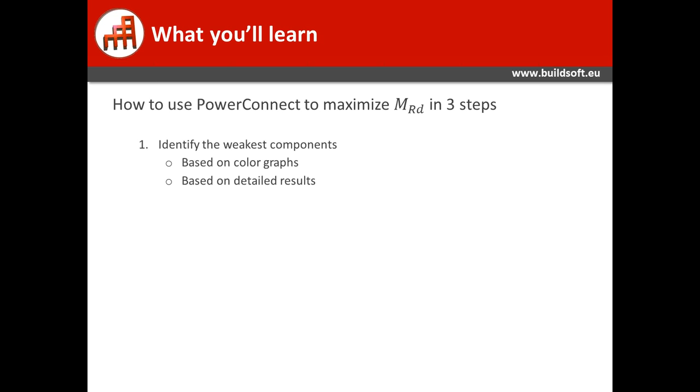This can be done based on the color graphs or on the detailed results. In the second step, we are going to calculate alternative configurations of the connections by adding, for example, stiffeners, changing end plate or bolt dimensions, and playing around with the bolt positions. Finally, we will have obtained an optimized and therefore less expensive connection, and this all within minutes in PowerConnect.

So basically we will show you how to interpret the results correctly and how to increase the moment resistance step by step. Now, first of all, improving a connection is not trial and error. It's not adding random stiffening elements and seeing what happens with the results. No, it is really modifying those elements that will have the most influence, so that you only need to add the elements that are really necessary, in such a way that the costs stay limited.

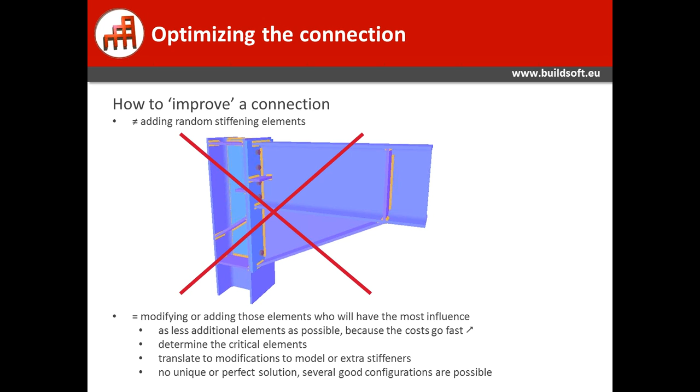Now, there is no unique or perfect solution. There are several good configurations possible. We will show you 2 methods, or 2 ways, to maximize the resisting moment.

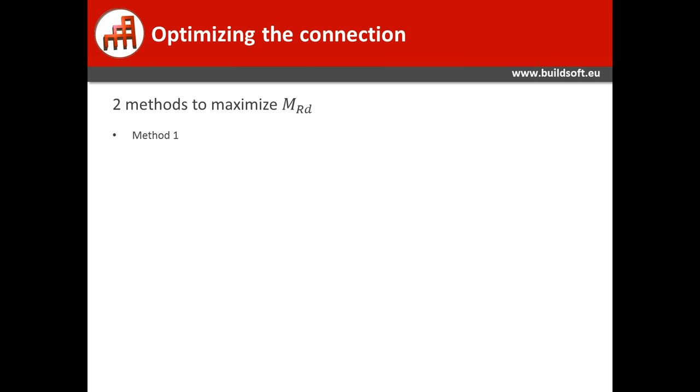The first one is a basic, very fast method based on the color graph results in PowerConnect. Within minutes you will have an economic design of your connection. The goal here is to add stiffening elements in the right places.

The second one is a more advanced one, where we go digging deeper into the PowerConnect results. It's really meant for fine-tuning the results, and we will also need some background information on the Eurocode calculation method.

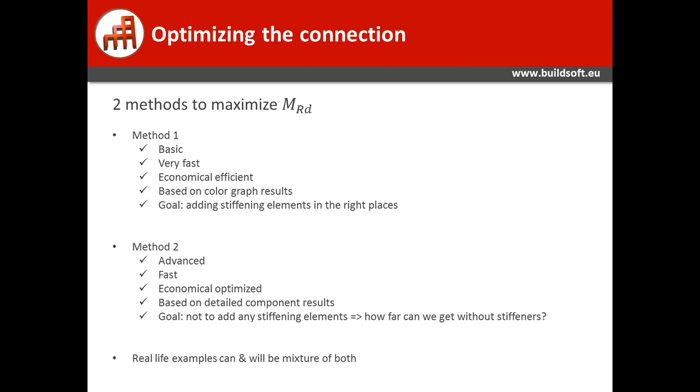Our aim here is to not use any stiffener at all, so we really want to know how far we can get without the use of any stiffener. Now, of course, in real life it will be a mix of both methods, so you will be using sometimes method 1 and at another time you'll be using method 2.

To make things a little more hands-on, we'll be using an example. It's a simple moment connection, an I-beam to an H column. The bolts are diameter 20 millimeter, the strength class is 8.8, and the welds are 6 millimeter.

So let us now go to PowerConnect. Here we have our first example.

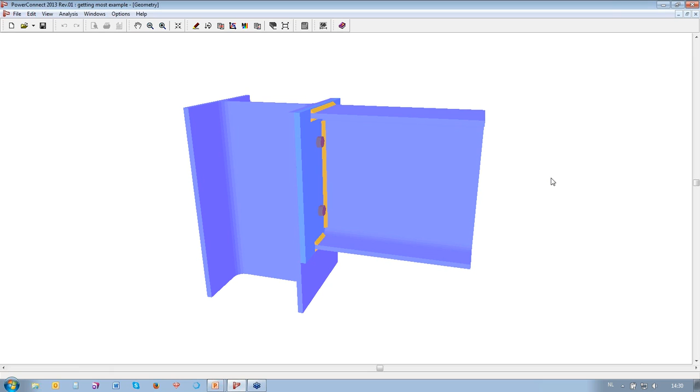Now let us start by optimizing the bolt position. I'm going to double click the bolts and optimize the bolt positions. What does this mean? It means that PowerConnect will try to place the bolts as high as possible, as close as possible to the beam flange, and as close as possible to the beam web, taking into account all minimum distances required by Eurocode.

Okay, let us now calculate the connection. And currently we have a resisting moment of 57 kilonewton meter. Now, how can we increase this resisting moment?

Well, we have 2 graphs. We have here a graph with the applied moment, but the applied moment is currently 0, so we'll be ignoring this graph. We'll be looking at the other graph over here, and this is the graph with the resisting moment, so this is the 57 put on the connection.

And what you see over here is that the elements that are most loaded will have a more red color. So in this case, the column web is the most loaded element, the most critical element of the connection, and it's shown in red. So it will be the first element to fail in the connection right now.

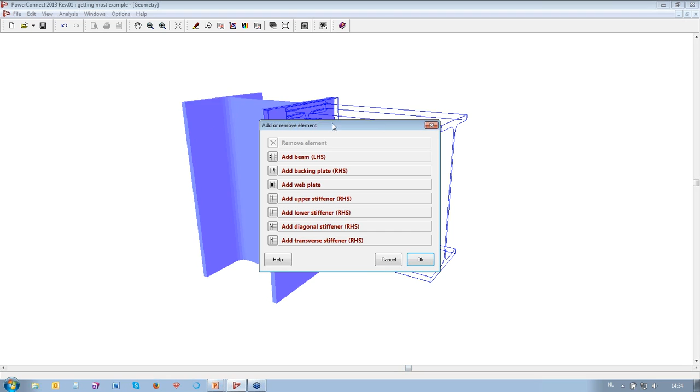So let's select the column. I'm clicking one time with the right mouse button, and here we have some elements we can add to the connection. One possibility is a web plate. Another possibility is an upper stiffener or a lower stiffener, and we also have, for example, a diagonal stiffener. So let us start by adding an upper stiffener.

Okay, let us calculate the connection again. Calculate. Now, as you can see, we have increased the resisting moment. We are now at almost 79 kilonewton meter. And if we look at the color graph, it's no longer only the column web, but also the column flange, the end plate, and the bolts who are now the critical elements. Who will now fail first?

So what are the possibilities right now? Well, we could go on with the column web, so maybe we could add a lower stiffener, or we could try to do something about the bolts. So what could you do about the bolts? You can choose a bigger diameter for the bolts, you could improve the strength class, or you could also add bolt rows.

Now for the end plate, you could modify the thickness of the end plate. For the column flange, you could add a backing plate. So many options, many possibilities. Let us simply choose one - for example, let us add some bolt rows.

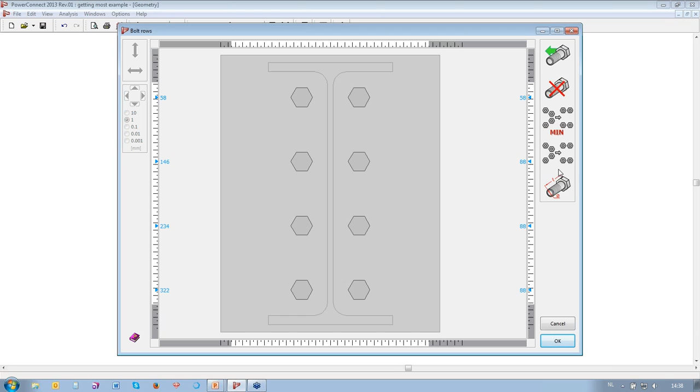However, something we could do over here is maybe changing the strength class of the bolts. So instead of an 8.8, we could use a 10.9. You can change this over here in the bolt details. So instead of 8.8, we're choosing 10.9, confirming with OK, OK, and let us now calculate the connection again. And we're now at 107 kilonewton meter.

So still, the column web is critical, the column flange is critical, the end plate and the bolts are critical. Let's focus again on the column web, and we could, for example, add a lower stiffener. So I'm returning to the geometry, selecting the column, and let's add a lower stiffener. Calculate it again - we are now at 130, so perfect.

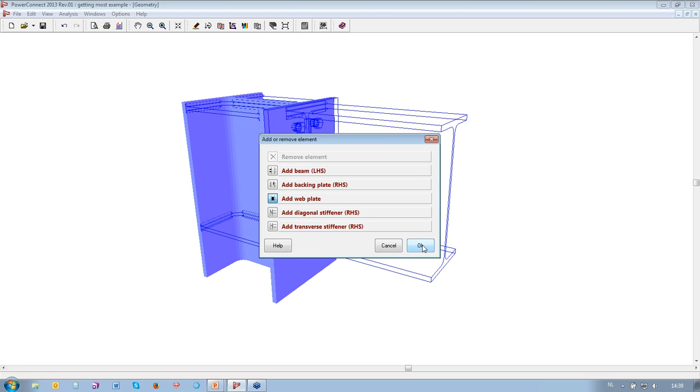Now we still have the column web problem, the bolts problem, the column flange and the end plate problem. What can we do? Well, maybe adding a web plate. So I'm selecting the column and I'm adding a web plate to the model. So let us calculate the connection again, and we are now at...

148. And as you can see, the column web is no longer a critical element in our connection. It's even so that the beam is becoming more critical right now. Now, if you are using a web plate, you should be very, very careful, because the influence of a web plate is very interesting, but you need to respect some minimum distances mentioned in Eurocode.

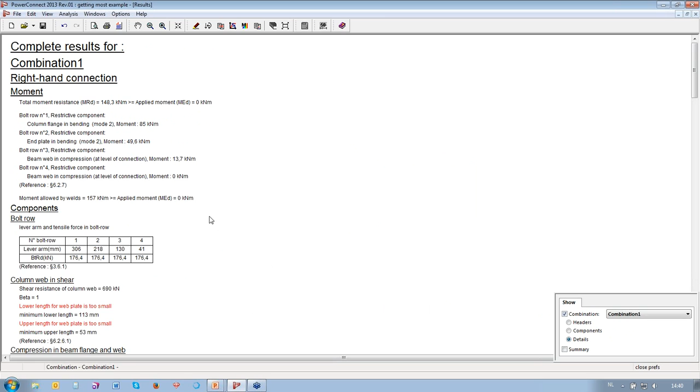If you go to the detailed results of PowerConnect for our current combination, you can see that Eurocode is requiring some minimum upper and lower lengths for this element. The minimum lower length of the web plate is 113 millimeter, so about 120, and the minimum upper length is 53, so almost 60 millimeter. If you don't foresee these minimum lengths in your model, in your connection, you cannot use the positive influence of the web plate.

So I'm returning to the geometry right now, and for the web plate, I'm going to double click it. I'm adding a minimum upper length of 60 and a minimum lower length of 120. We'll click OK. This is now the correct configuration, the correct way to use the web plate. If we calculate again, we will have just the same results, being 148.

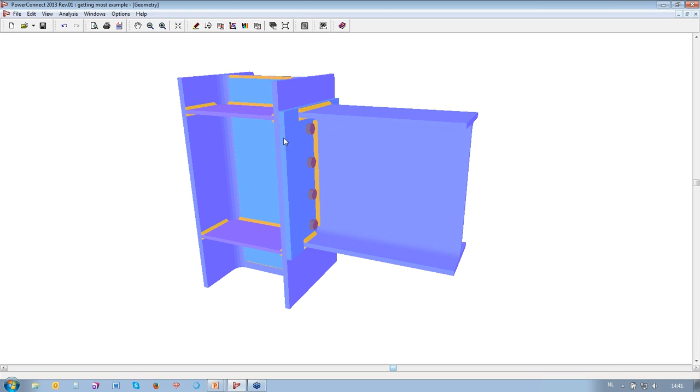Now, say you have the possibility to make these extensions in the model, maybe it would also be interesting if you could extend the end plate. So just to show you the influence of this extension, we will delete the web plate. We will add it later on, and I will now double click the end plate, and let us go for an upper extension of 75.

I will double click the bolts now, and let us optimize the bolt positions again. Click OK, and now we can calculate the connection again with this new added upper extension for the end plate, and we are now at 157 kilonewton meter.

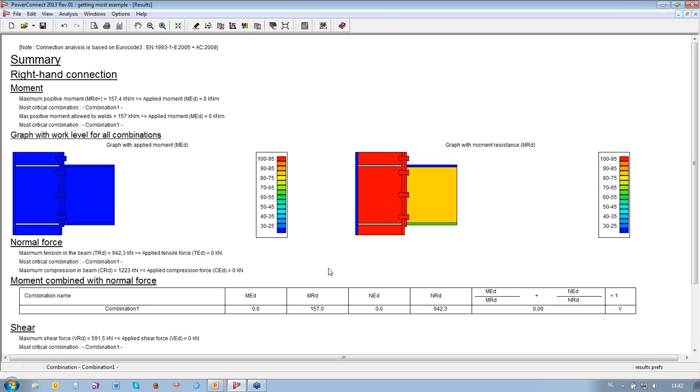And now, as you can see, still column flange, end plate, bolts, column web are critical. So maybe for the end plate, we could thicken the end plate a little bit. Double clicking the end plate, instead of CF, which is the thickness of the column flange, maybe I could use 18 millimeter. Let's calculate it.

As you can see, the end plate is no longer a critical element, but still the column flanges. It's not so easy to modify the thickness of the column flange because this is already a fixed parameter, a fixed value. But you could use a stiffening element to modify or enhance this.

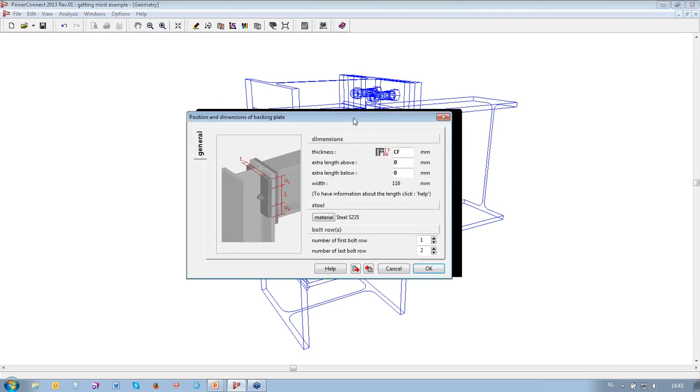So I'm going to open the dialog to add an element, and the correct element over here is a backing plate. We'll add a backing plate to the column flange, and I will double click the backing plate, and let us take a look at the bolt rows. Currently the backing plate is going over only the first two bolt rows, but I want the backing plate to go over all 4 bolt rows. We'll be calculating the connection again, and we are now at 168.

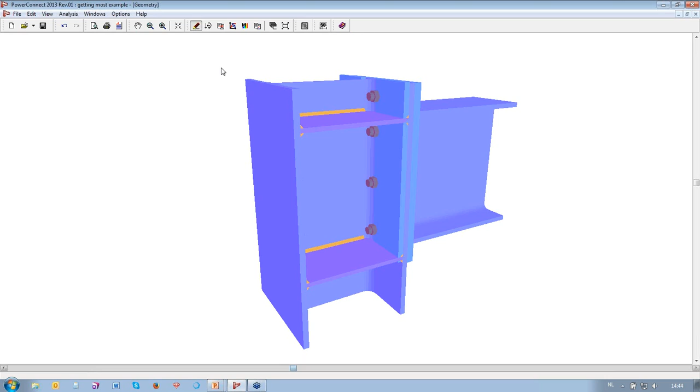And of course, still the bolts are in red, the column web, so we could add our web plate again and calculate the connection again. And we are now at 194, almost 195 kilonewton meter resisting moment.

So we started off with 57, so we now have almost 4 times as much as our starting value of resisting moment. And as you can see here in our color graph, the beam is becoming critical right now. So this is the point where you should do something about the beam if you want to further increase the resisting moment. However, another option could be, for example, adding a haunch.

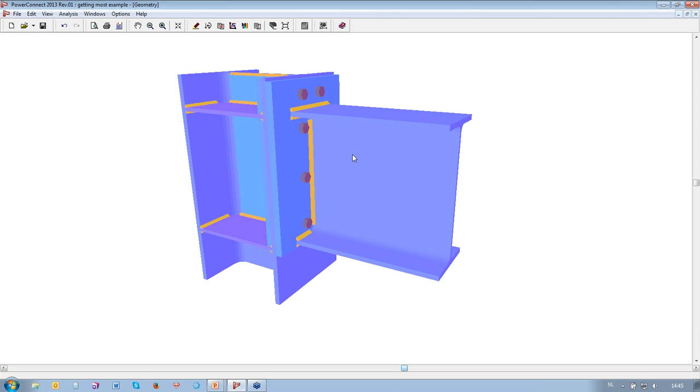So we deliberately didn't use any haunches until this point because we really wanted to show the influence of these different stiffeners. For adding a haunch, I'm selecting the beam, and here you can opt for a lower haunch, for example, and then you can double click the bolts and optimize the bolt positions, and calculate it. Now we are at 288 kilonewton, which is a lot.

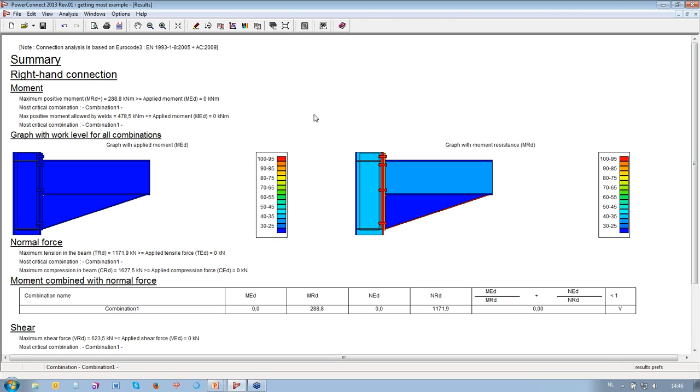So let us now return to the PowerPoint. Let's have a little summary of our example. We first started out with a resisting moment of 57, and the critical element was the column web.

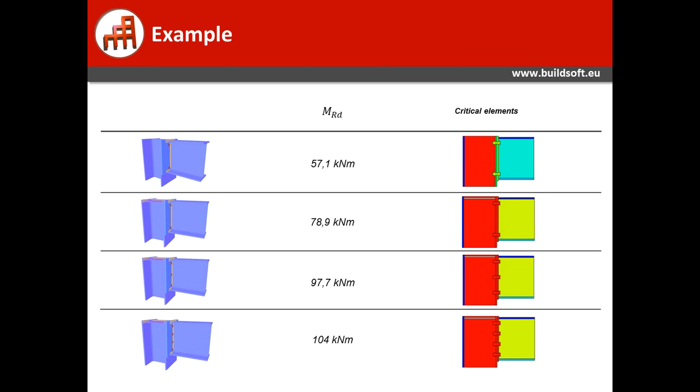Then we added an upper stiffener, and we had a resisting moment of 79. We added a bolt row, so we went to 98. We added another bolt row, we ended up with 104. After that, we could not add any more bolt rows, so one of the options was adding a lower stiffener.

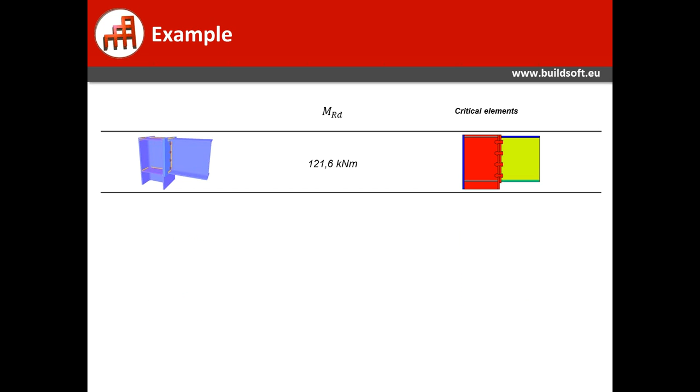We also changed the bolt quality to 10.9. Then we added the web plate. Be careful, of course, if you're using the web plates, please respect the minimum distances required by Eurocode. We removed the web plate, and we added an upper extension for the end plate.

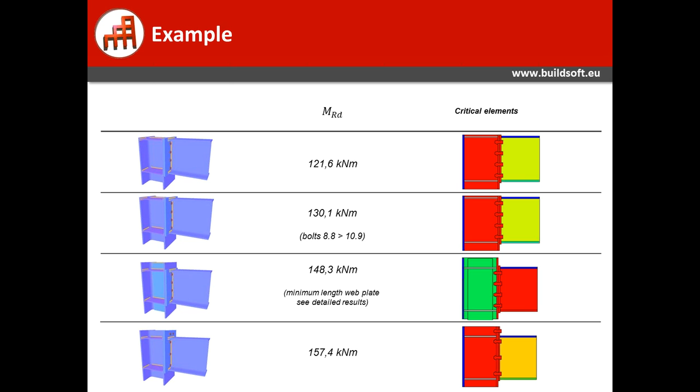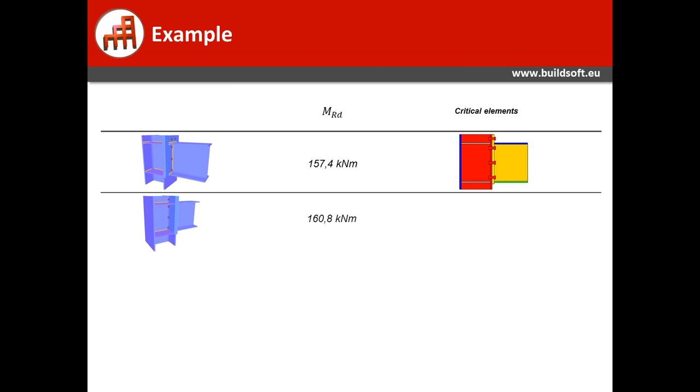We have modified the thickness of the end plate, added a backing plate, and added the web plate again. Our final value was almost 161 kilonewton meter resisting moment. So that was it for the first method.

Now for the second method, the second way. This is the way you want to follow if you really want to fine-tune the results, if you need that little extra, but it also takes more time and some knowledge about Eurocode. So we'll be starting the second method with the Eurocode calculation model.

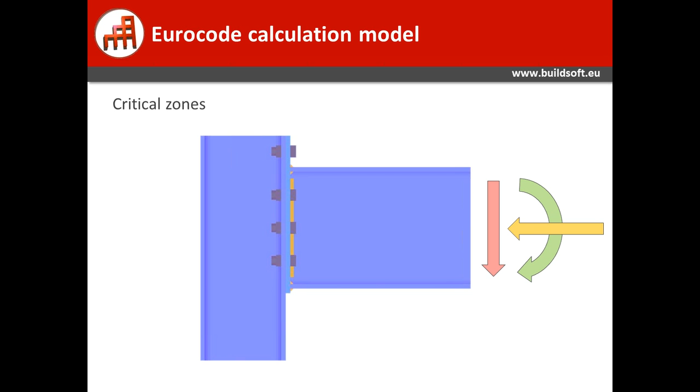Say we have a beam column connection. We will add a normal force, a shear force, and a moment force. What will happen with the connection? Well, something like that. It's a little bit too much, but you get the idea.

So we can distinguish different critical zones in this deformed connection. Over here we have a zone in tension in the column. We also have a zone in tension in the beam. We will have a zone in compression in the column, and also a zone in compression in the beam, and we'll have a zone in shear.

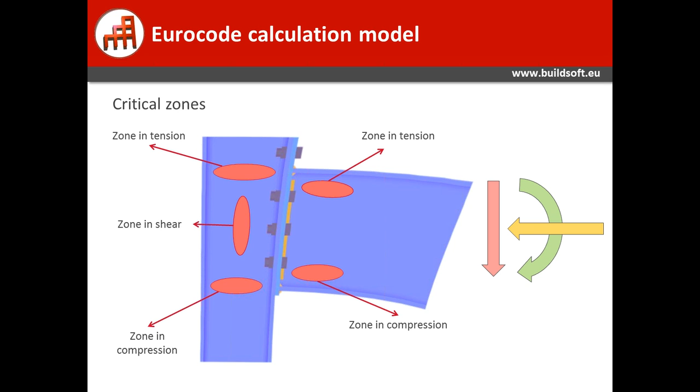Now each of these zones consists of different components, different parts that can fail individually. For example, in the tension zone, we could have yielding of the column web, yielding of the column flange, yielding of the beam web, yielding of the end plate, bolt failure, weld failure.

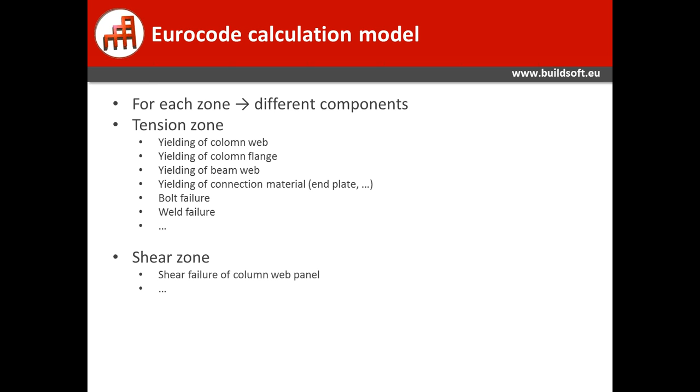For the shear zone, we could have shear failure of the column web panel. And for the compression zone, we could have crushing and local buckling of the column web, and crushing and local buckling of the beam web and the beam flange.

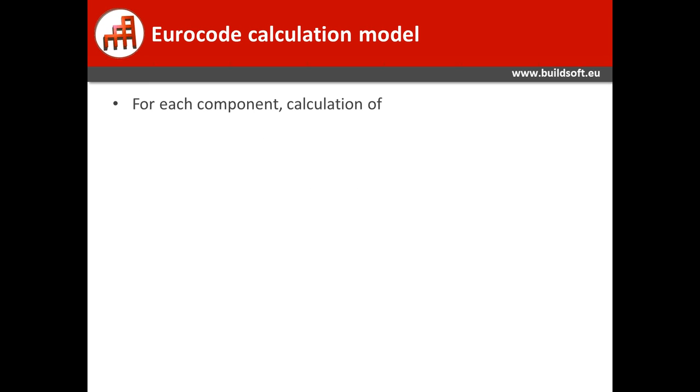Now, for each of these components, of these parts, we'll be calculating the resistance, expressed as a maximum tensile force F. And we'll also be calculating a stiffness, expressed by the stiffness factor K. Now, we will not focus today on the stiffness, so we can ignore this for the examples today.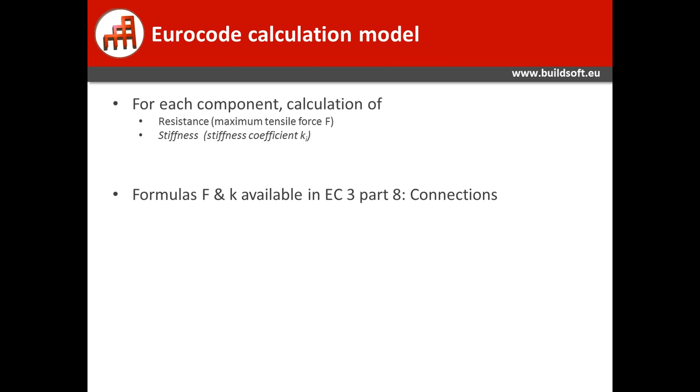Now, in Eurocode 3 part 8, this is the part about connections, you can find all kinds of formulas for the calculation of the maximum tensile force F and the stiffness factor K. For our connection in particular, which components or which parts of the connection do we need to check, do we need to verify?

Well, first of all, we need to check the column web in shear. And I've also mentioned the section in Eurocode where you can find the formulas. The second one is the column web in compression, the column web in tension, the column flange in bending, the end plate in bending, and the beam flange and web in compression, and finally the beam web in tension.

Now, we have made an overview of all these formulas, and on the left-hand side we will place all the formulas for the column, and on the right-hand side we will put all formulas for the end plate and the beam side.

So the first one to check is the column web in shear, and this is the formula. What do we see over here? We see the yield strength of the column web. This is a very simple, known value. We have the safety factor and we have the shear surface of the column web.

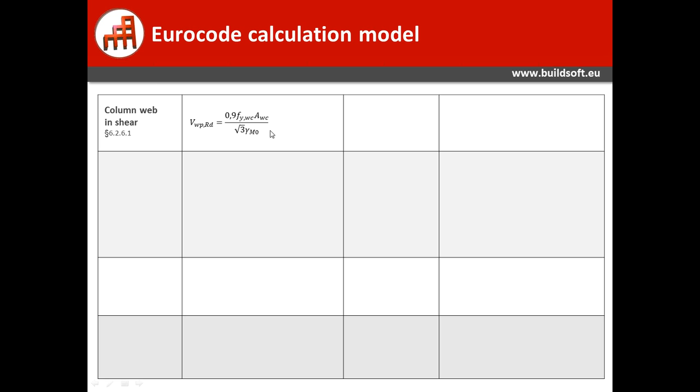Second ones to check are the column flange in bending and the end plate in bending. Now I've grouped them together. Why? Because these checks for the column flange in bending and the end plate in bending are very much alike. There are like 99% similarities. So there are 3 formulas to be checked, and you have to take the minimum of all 3.

So this is the first one. What do we see over here? Well, it's the thickness of the column flange, the yield strength, safety factor, and some effective length, and an M factor. Now, if you take a look at the end plate in bending, it's just the same formula, except, of course, instead of the thickness of the column flange, we have the thickness of the end plate. And instead of the effective length for the column flange, we have an effective length for the end plate.

And this is the same really for the second value to be checked. So we have here the thickness of the column flange, the yield strength of the column flange, and here we have the thickness of the end plate and the yield strength of the end plate. So these checks are very, very much alike.

Now, the L effective and the M and the N factor, which we don't know, are mentioned in Eurocode 3 part 8, and they depend on the different bolt positions. You can find formulas to calculate them. What else needs to be checked? Well, we have the column web in tension and the beam web in tension. And again, these 2 formulas are very similar.

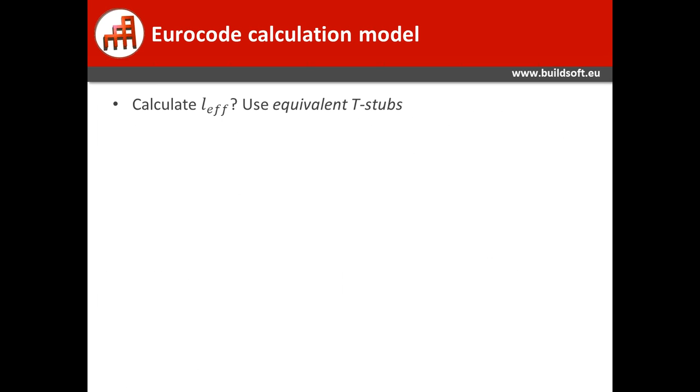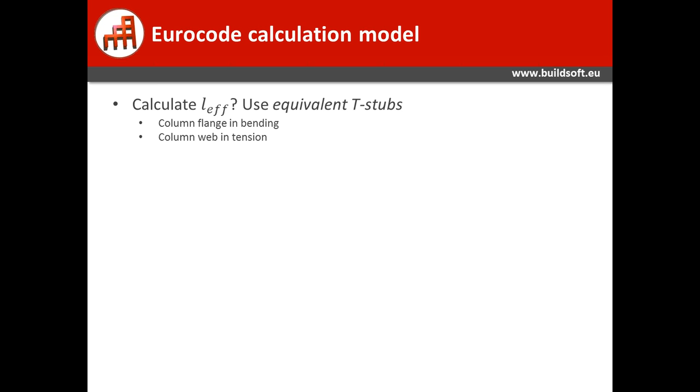Now, for the calculation of the L effective, so the effective length, Eurocode uses equivalent T-stubs. The following components use this T-stub: the column flange in bending, the column web in tension, the end plate in bending, and the beam web in tension.

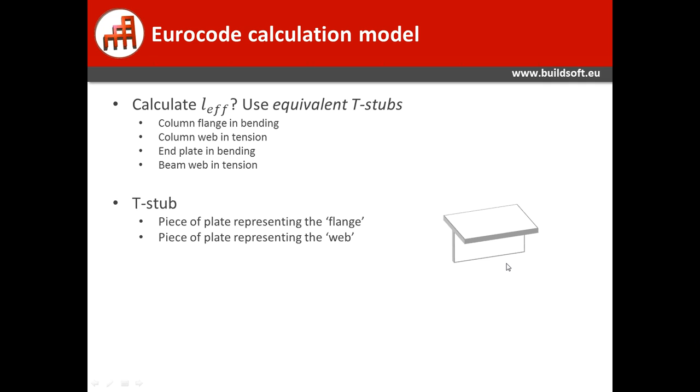Now, a T-stub, what is a T-stub? Well, it's a piece of plate representing the flange, and a second piece of plate representing the web, and here you can see how we got the T name. So this is forming a little T, and we need also one or more bolt rows, with one bolt on each side of the T-web.

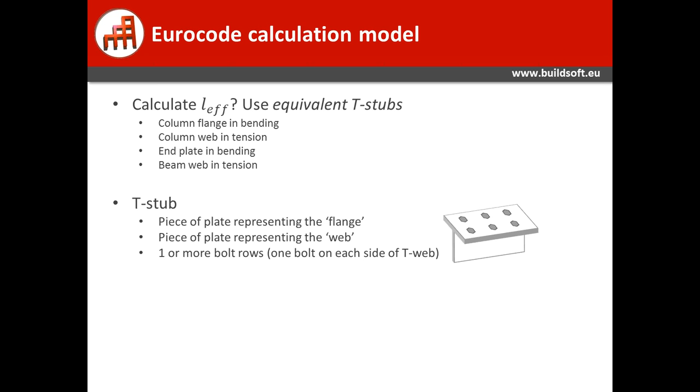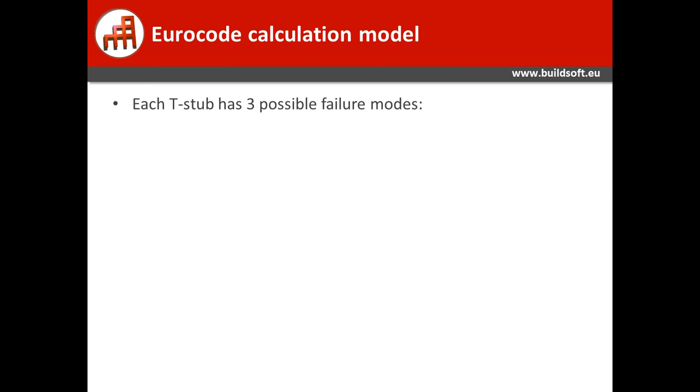Now, what is so special about these T-stubs? Well, each T-stub has three different possible failure modes. The first mode is a complete yielding of the flange, so the flange of the little T-stub will fail first, and the bolts will remain the same. They will not fail first.

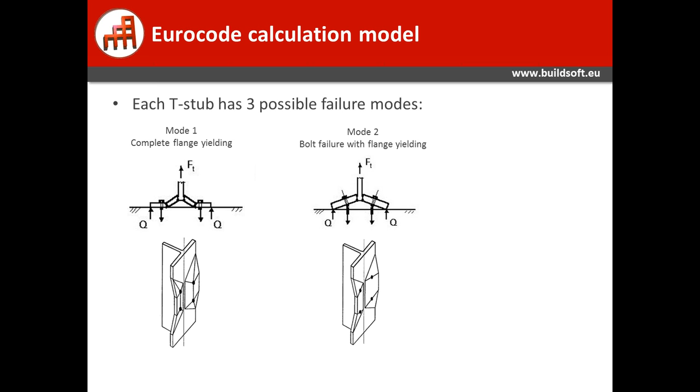In a second mode, a second possibility of failure is that the bolts together with the flange will fail. A third possibility is that only the bolts will fail, so the flange is stronger than the bolts, and the bolts will fail first. Now, mode 1 usually occurs when you have thin plates but strong bolts, and mode 3 will occur when you have thick plates but weaker bolts.

Now, you never know in advance which of the three will be determining or decisive, so you need to calculate each of these three modes and take the minimum. This is in correspondence with the three different tensile forces for the column flange in bending, and the end plate in bending.

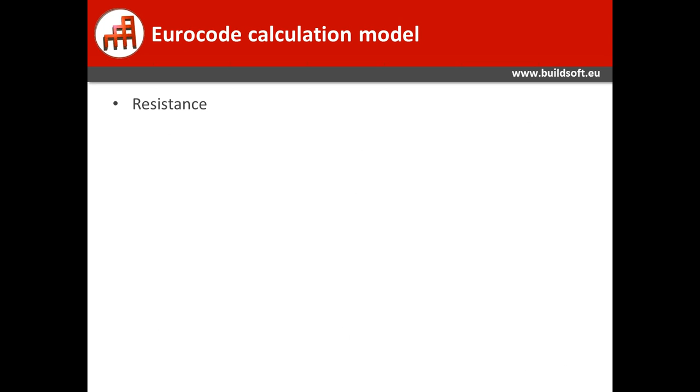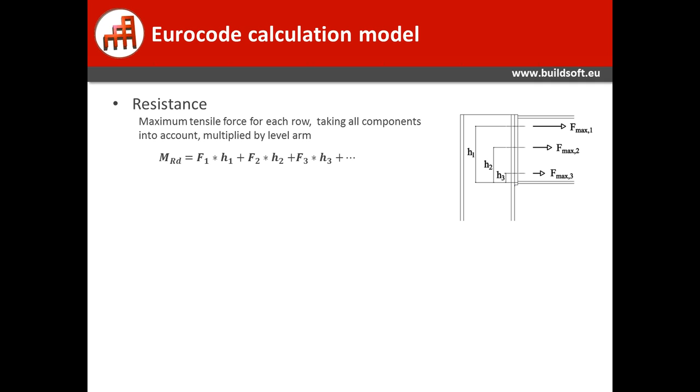Now, say we have found for each part, for each component, the maximum tensile force. Well, then you have to take the maximum tensile force for each row, taking into account, of course, all the components, and for the calculation of the resisting moment, we will multiply these tensile forces by the lever arm. That will give us a resisting moment.

Now, what should you remember for the resisting moment? Because we have told a lot. Well, as you can see, directly in the formula, you have a direct influence: the lever arm is very, very important to increase the resisting moment. Another thing is, of course, that the maximum tensile force is a minimum of all the different components. So if you want to have a higher resisting moment, so a higher tensile force, you should affect the minimum of all these components. Otherwise, the tensile force will not go up.

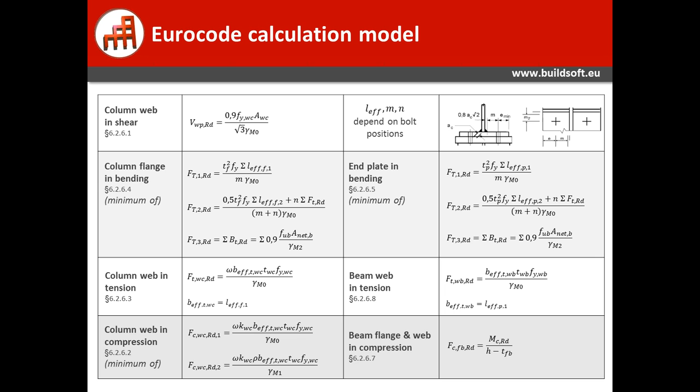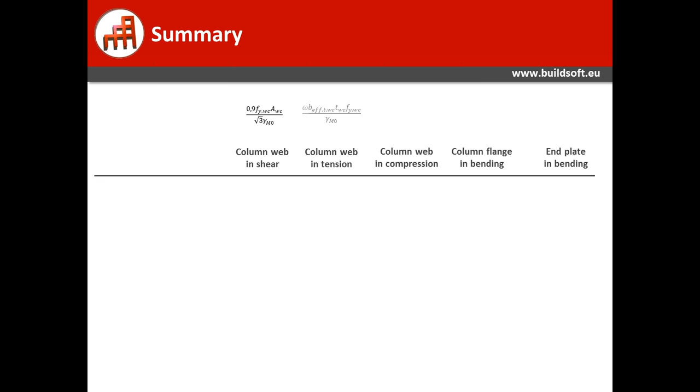So if we take a look again at our table with the different formulas, and let us assume that we are not going to focus on the beam part, so only the end plate and the column part. So let's forget the beam formulas. Well, we rearranged the formulas a little bit so that we can get a summary of the influence parameters in these formulas. So we have our different components with the formulas, and now let us see what is influencing these components. Let's start with the bolts.

Say we were to edit or modify the material, so the strength class of the bolts. Which components will be affected? Well, it will clearly be the column flange in bending and the end plate in bending, but only if mode 2 or 3 is critical. If it's mode 1, the material will not have any effect at all.

Now, for the diameter of the bolts and the positions of the bolts, the column web in tension will be affected, as well as the column flange in bending and the end plate in bending.

For the end plate, if we change the thickness or the material of the end plate, it will only be the last component, the end plate in bending, that is affected.

If we foresee an extension in the compression zone, you just have to take my word for it, but it is the column web in compression that is affected, and the maximum influence you can get there is 2 times the thickness of the end plate.

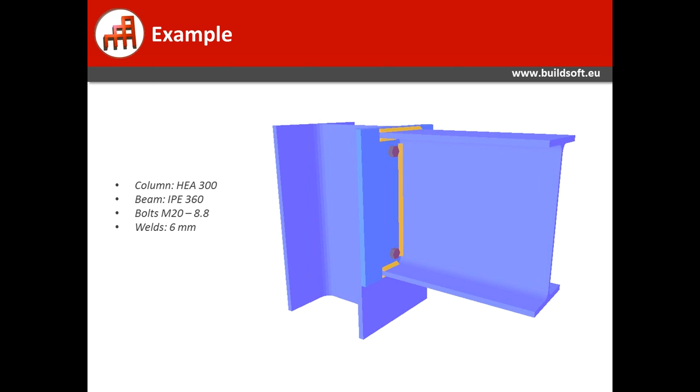So let us now do the same example as before, but following the second method.

I will now open a new file. Okay, so here we have the same connection.

First thing that we are going to do is optimize the bolt positions. So let's double click the bolts and optimize the bolt positions. And let's calculate the connection. And of course, we end up with 57 kilonewton meter.

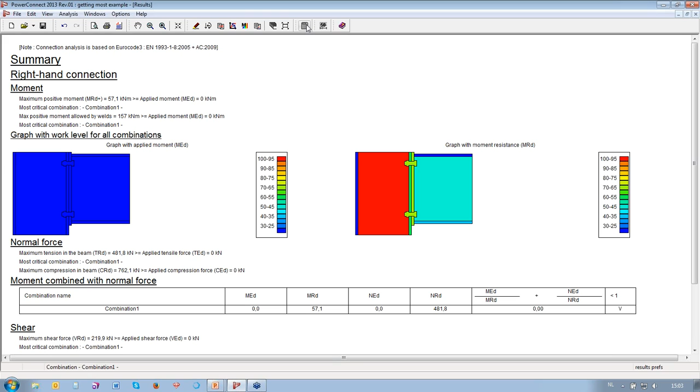Now, if we want to use a second method, we need more information about the results. So we are going to ask for the results per component, per part. So, what do we see over here?

Well, of course, the total moment resistance, we know already that. And we see also for each bolt which is the restrictive component, meaning which is the critical component. So apparently for both of the 2 bolt rows, this is the column web in tension.

Now below you will have a list with all the components calculated. So we have indeed the column web in shear, the column web in compression, the compression in beam flange and web, the column flange in bending, the column web in tension, the end plate in bending, and the beam web in tension. As you can see, bolt row number 1 is taking about 50 kilonewton meter.

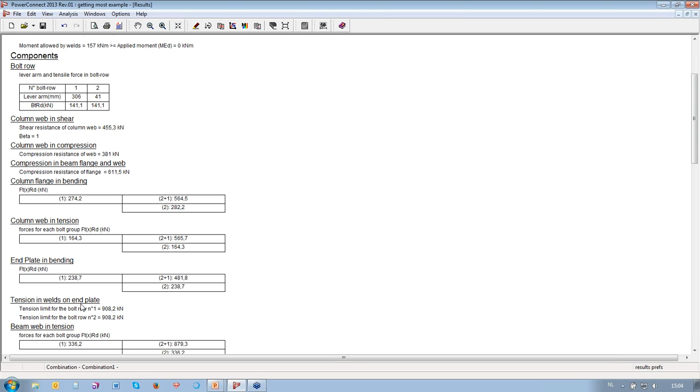Where is this value coming from? Well, the column web in tension is critical, so if we take a look at the column web, we see indeed this is 164, and if we take a quick look, we see this is the minimum of all the tensile forces calculated.

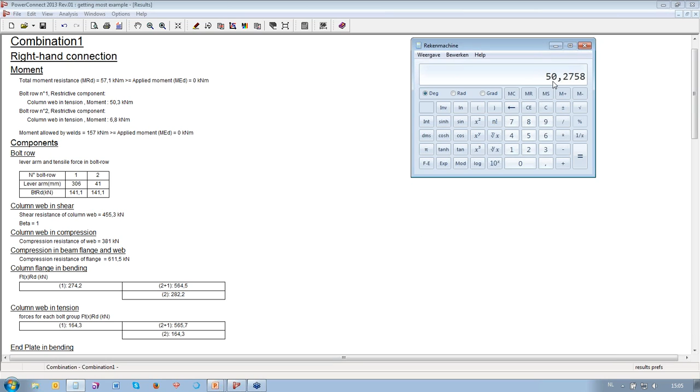So the 164 is critical. And if we take a look now at the lever arm, it is 306 millimeter. So if we now multiply 164.3 to be exact by the lever arm, putting this in meters, we end up with 50.27, so this is 50.3 kilonewton meter. So this is where this value is coming from.

Now, we want to affect or increase the resisting moment, and our critical component is the column web in tension. What do we have to do?

Well, I'm returning to the PowerPoint presentation. And here we have the table again. So, column web in tension, what are the options? Well, we could add a gusset haunch.

Now, there are other options. A web plate, well, our goal is to not use any stiffeners. Also, the horizontal stiffener is not an option. So the one thing left is playing with the diameter or the positions of the bolts. So I'm returning to PowerConnect again.

Let's go to the geometry and double click the bolts. So playing around with the position of the bolts, what are the options?

Well, if I'm selecting this bolt row, we could move the bolts vertically. But this will mean practically that our lever arm will be smaller. It will decrease, because the bolt positions are now optimized, meaning they're placed as high as possible, as close to the beam flange as possible, taking into account the minimum requirements by Eurocode. So the only way is down, and that's not a good idea because less lever arm means less resisting moment.

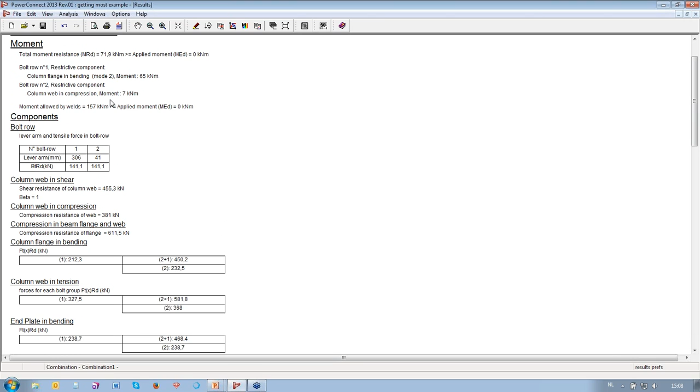If we look right now at the critical components, we see that it's no longer the column web in tension, but the column flange in bending. So if we play around with the horizontal positions, these values change—one is getting lower, another getting higher.

I think normally there should be somewhere an optimal value where these three tensile forces should be almost equal. Then we have reached an optimum tensile force.

What we see over here, maybe I didn't explain it a few minutes ago: here we have the maximum tensile force for a T-stub containing only the first bolt row, here for a T-stub with only the second bolt row, and here the maximum tensile force for a T-stub consisting of both the first and second bolt row.

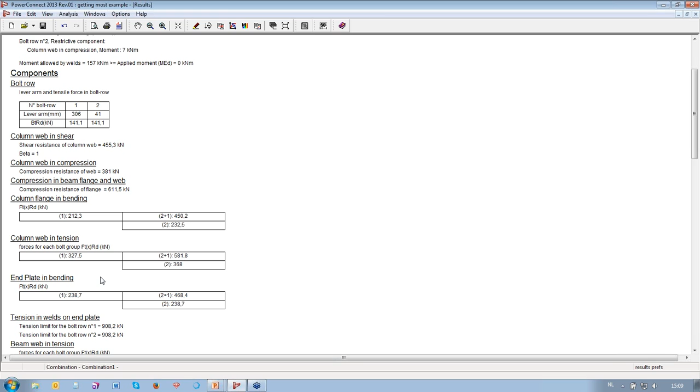So the column web has increased in tensile force, the other one has lowered. Let us now try to find a good value for the horizontal distances so that all three are the same—then we will have the highest resisting moment.

Let's return to the geometry and move them all together, and we'll put it at 99 millimeters. Let's take a look—this one is now at 230, 274, 238.

I think we can still get a little bit more. So let us now put this at maybe 93 millimeters. Let's calculate it.

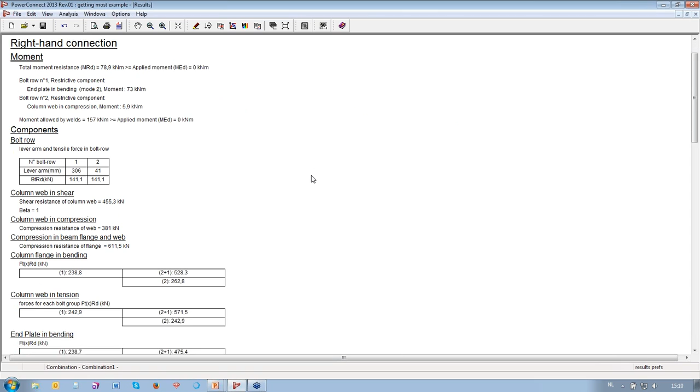Right now, all three values are practically the same. There's still a little difference, but I think it's negligible. So we have now 238, 242, and 238.

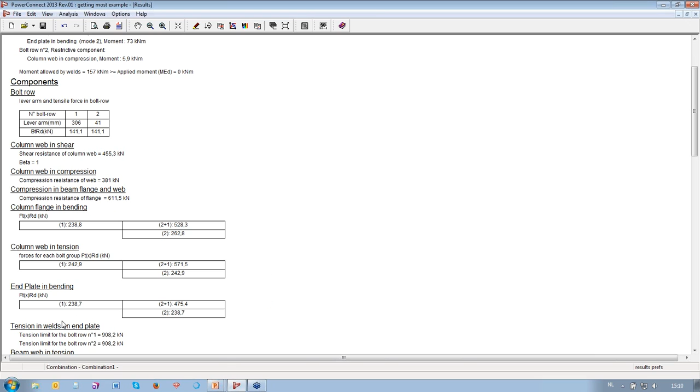So if you really want to optimize the resisting moment, you should make sure these three values are almost the same. And our resisting moment is now 78.9, almost 79 kilonewton meters.

Now, if you remember, in our first example, when we added the upper stiffener, we had the same value for resisting moment. So really what we have done here is eliminate the use of the horizontal upper stiffener. We don't need it right now.

Now, if we take a look at our critical component, because of course we'd like even more resisting moment, our critical component right now is the end plate in bending, mode 2. Mode 2 means the end plate will fail together with the bolts—it's the flange of the T-stub, which in this case is the end plate itself.

So what can we do? Let's return to the PowerPoint. For the end plate in bending, we could play around with the positions of the bolts, but that will decrease the other value, so we have to be careful. We could also do something about the thickness or material of the end plate, or, of course, another very logical decision would be to add a bolt row.

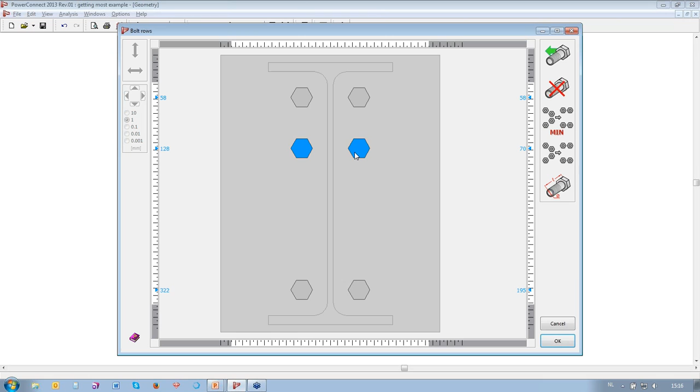You could even opt to use the minimum optimization function. This will place the bolts as closely together as possible so that you can achieve the highest possible lever arm, or the maximum lever arm possible. Of course, when you do that, we will need to put the bolts back in their position of 93.

Now, this is a very interesting feature to increase the resisting moment. However, you should be careful also. You can use this configuration if you have a moment that is always working in the same direction. What do I mean about that? If your moment is always positive or always negative.

For example, if you have a structure with wind loads acting on it, you could have one time under wind pressure load case a positive moment acting on the structure or on this connection, and another time when you have more suction of the wind, you could have a negative moment. And then in that case, you do not have the same bolt positions for the different cases.

If you use this function, the complete optimization, then the bolt distances are always equal. So you have the same position of bolts, the same lever arm for all the different moment load cases. So for the bolt positions that we have now, this is perfect if your moment always works in the same direction. If you always have a positive moment or always a negative moment, then this is perfect.

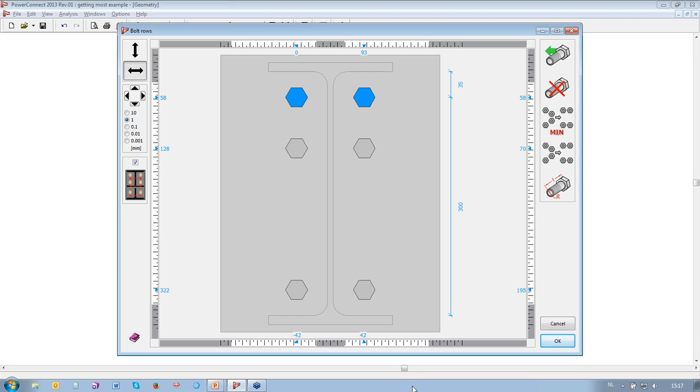Okay, and let us now calculate it again. And we are now at 106. Why? Because due to the minimum optimization, the bolts can be placed even a little bit higher.

Now, and we have still the end plate in bending mode 2, so what can we do about that? Well, for example, we could double click the bolts and we could change the bolt strength to 10.9 instead of 8.8.

Okay, let's calculate it again. And we are now, instead of 106.6, we are now at 106.9.

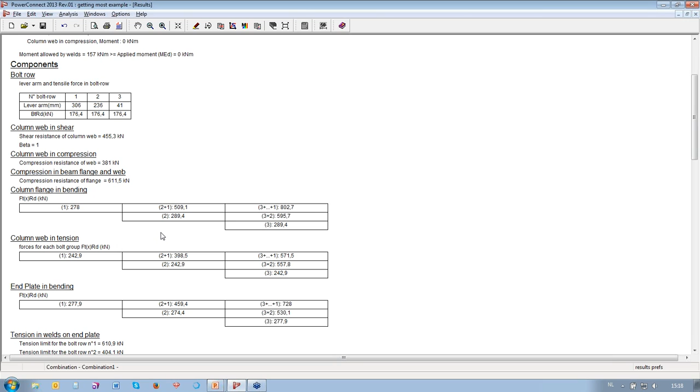And if we do that, we have to be careful, because now the column web in tension is becoming again critical due to the modified strength of the bolts. We have another behavior of our different components, so we will have to search for another optimal horizontal distance.

So I think maybe a little more outside, maybe 96, like that. Still the column web in tension, maybe a little bit more. 98. 99 probably.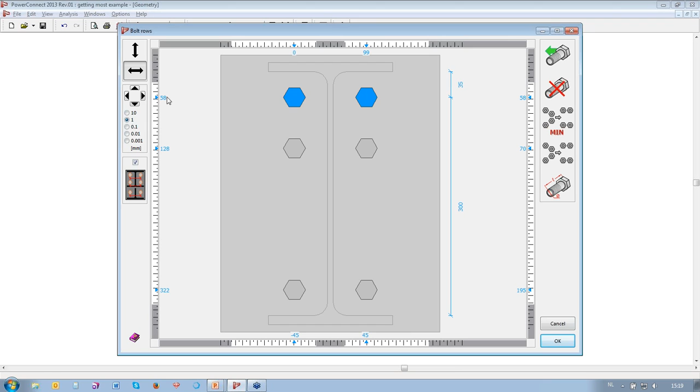So now it is the column flange in bending that is critical, and we are now at 108.8. Now, what can we do about the column flange in bending? Well, really not so much, because of course we cannot change the thickness of the column flange. Now, mode 2 means also that the bolts are critical, but I think we have taken all possible measures for the bolts.

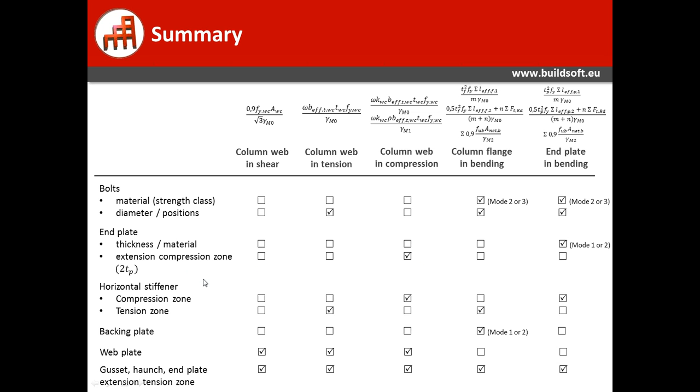So another thing we could do is do something about the column web in compression. And if we go back now to the PowerPoint, well, for the column web in compression, the options are quite limited. So basically you need to add a stiffener in most cases, but you can gain a little bit by extending the end plate in the compression zone. So we need to have at least 2 times the thickness of the end plate.

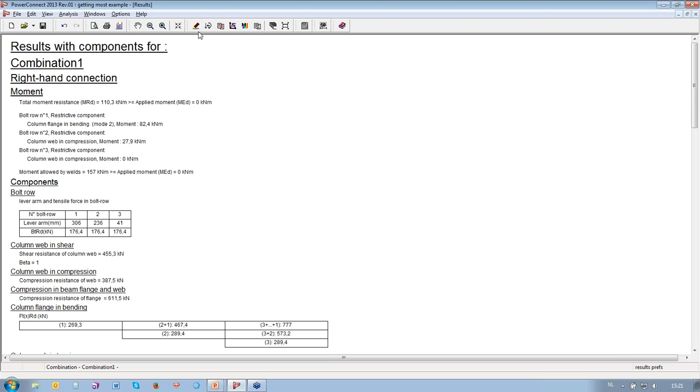So what else can we do? Well, something that is always helping in every case is, of course, trying to maximize the lever arm. So what can we do to increase the lever arm? Well, we could extend, going back to the geometry, now we could extend the end plate. On the upper side, for example, 75 millimeter.

I'm double clicking these. Let's optimize their distances, and let's place the bolts again at 99 interdistance horizontally, and let us calculate the connection again. Right now we are at 135.7 kilonewton meter.

Now, what else can we do? Well, if we look at the critical components, the end plate in bending in mode 1 is critical. So mode 1 means that the flange of the T-stub, so in this case the end plate itself, will fail first. What can you do? Well, you can change the thickness or you can change the material. So we will change the thickness.

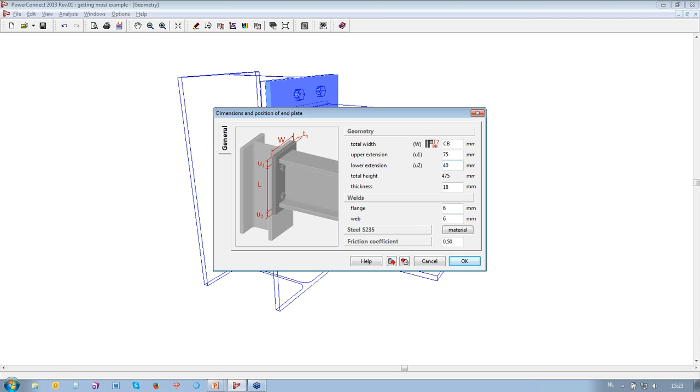We go back to the geometry. We'll double click the end plate. Now instead of 14, we will use 18. And when we change this thickness, we should also change the lower extension. So we'll have 40. Strictly spoken, we only need 36, but maybe 40 is more easy.

Okay, that's calculated. And we are now at 141.9, so almost 142 kilonewton meter. We started off at the beginning with 57, so we almost tripled the resisting moment. And our critical component right now is the local tension in the welds, so that is something totally different. You should go and check the welds and edit them really.

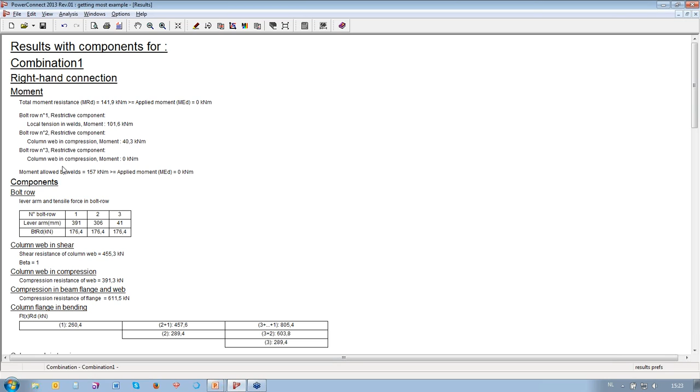So let us return to the PowerPoint. Now we've also made a table with how you can influence the lever arm, and how you can try to have these three components - the column web in tension, the column flange in bending, and the end plate in bending - equal to each other, and then the bolt resistance, the BT.

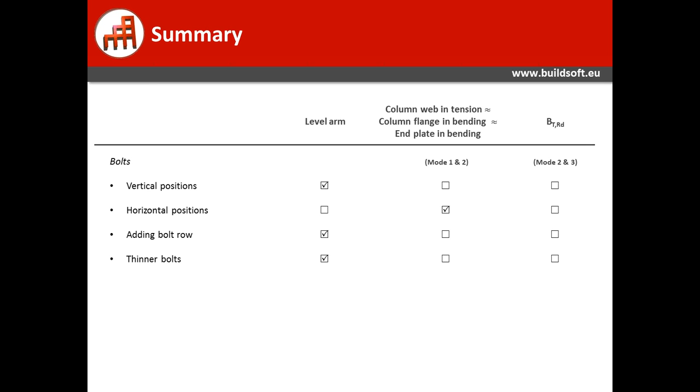So if we change the vertical positions, the lever arm is affected. For the horizontal positions, well, you can play with the horizontal positions for the three components. If you add a bolt row, well that's good for the lever arm. If you use thinner bolts, it will affect the lever arm. How is that? Well, thinner bolts can be placed higher or closer to the flanges of the beam.

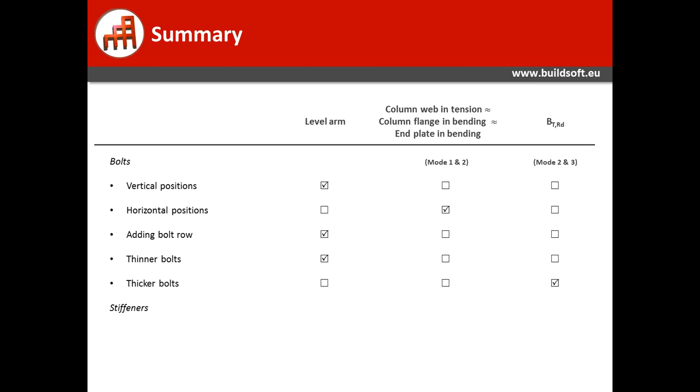So it will help a little bit. And then thicker bolts will of course affect the bolt strength, the bolt resistance. And any kind of stiffener will increase the lever arm.

Now, for our example, well, we started off with 57 resisting moment. Now the critical element was the column web in tension, so we have optimized the horizontal distances and we ended up with 79. And the next step, the end plate in bending was critical, and that was mode 2, so as well as the bolts as the end plate.

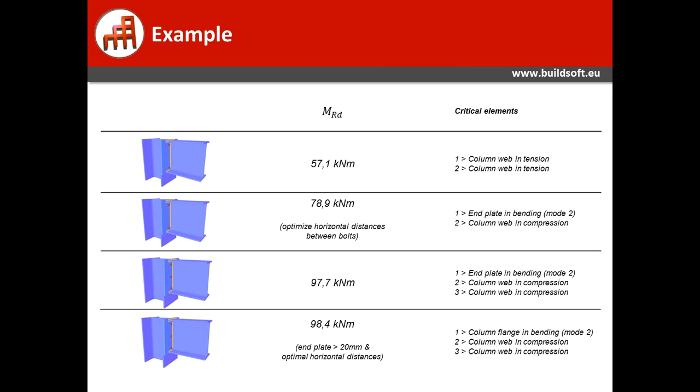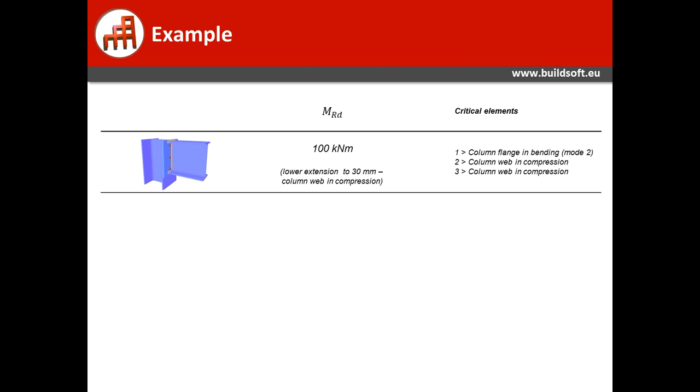So we've added the bolt row. Then we have added another bolt row and removed it again. We have changed the end plate thickness. We have foreseen a lower extension of the end plate for helping the column web in compression. And we also applied the minimum distances of the bolts.

And you can use this if the moment has always the same orientation, so if it's always negative or always positive. And then we have changed also the bolt quality. We have foreseen an extension of the end plate. Oh, I'm a little too fast right there. And we ended it right there with the optimization according to the second method.

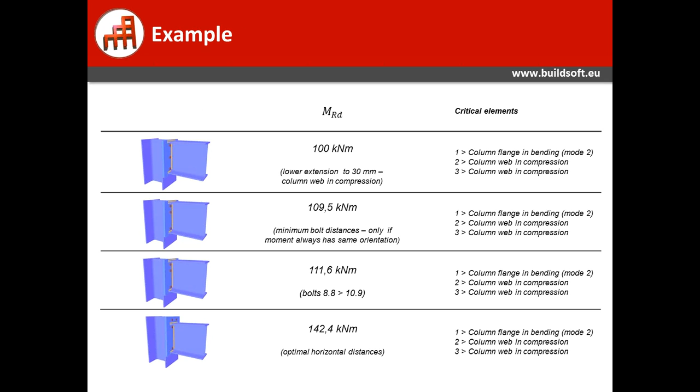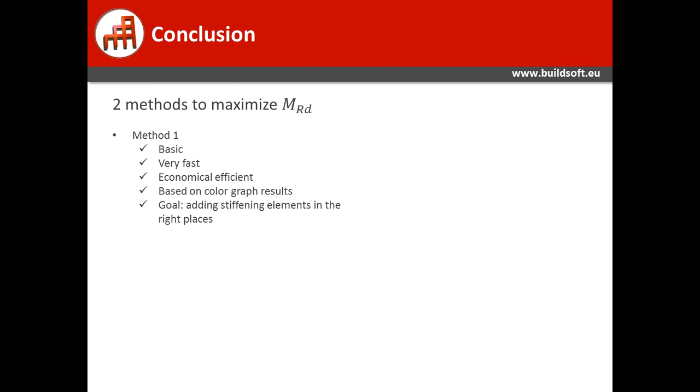So we ended up with 140 kilonewton meter moment resistance. Now the conclusion of today is that we have shown you two methods to maximize the resisting moment. So the first method was a basic method, which is very fast, and it was based on the color graphs, and the idea was to add the stiffening elements in the right places.

Now the second method was also a fast method, but it was a little more advanced, so you needed some background information about the Eurocode. It is based on the detailed component results, and the goal was to not add any stiffening elements at all. So the question was, how far can we get without using any stiffeners?

Of course, in real life examples, you will mix both methods and you will use the one that is helpful for you in that case. But we have shown you today that with PowerConnect you can easily and fast calculate alternative configurations of the connections, and you can really reduce the stiffeners. You can even avoid them if you play it well, and you know where to do, what to do. So you can really optimize the connection and save money.